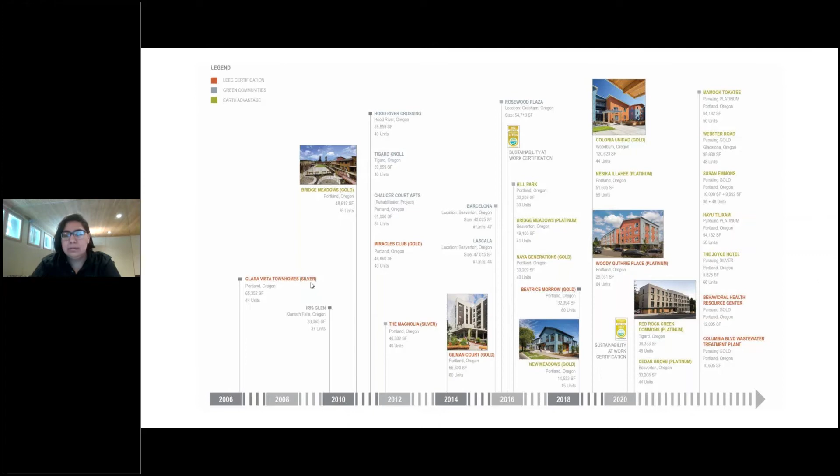but as I looked into these projects, I began to be more interested in affordable multifamily housing and seeing what helps make the most impact to the predicted EUI. But I will talk about that in the upcoming slides. And first, let's look into the overall data of the 3 years that reported to the DDx.

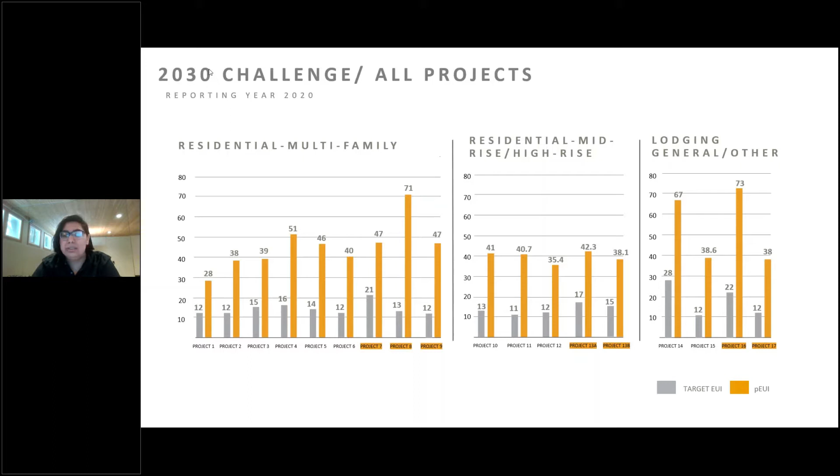One of the goals for CHA is to increase the number of projects that have 60% reduction. Since there have not been many of the projects with this amount of reduction, they are putting this into consideration for their future projects. So on the plus side, many of the projects are getting modeled and giving the firm better feedback for predicted EUIs, or energy use, and making it easier to see where they are standing in the overall average.

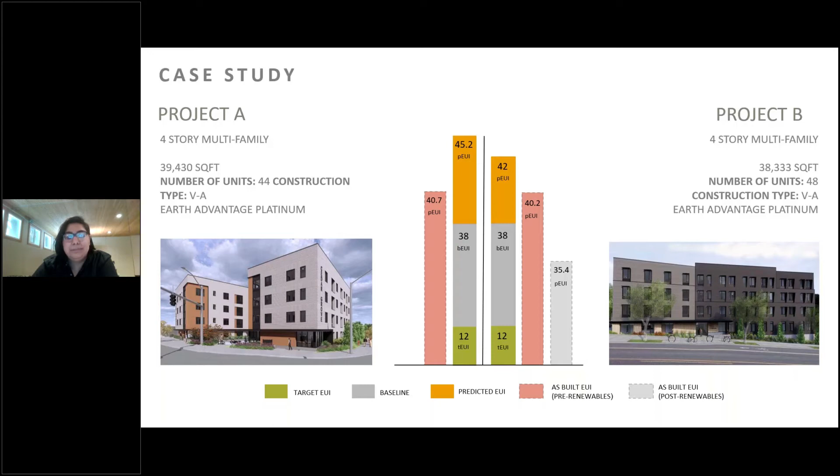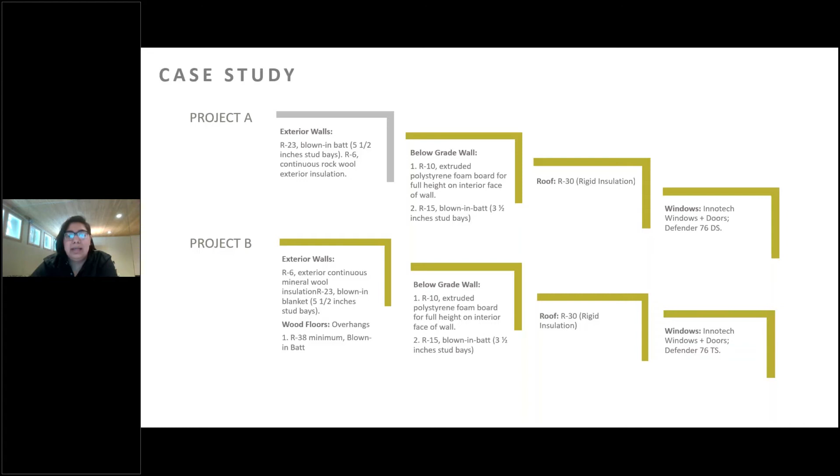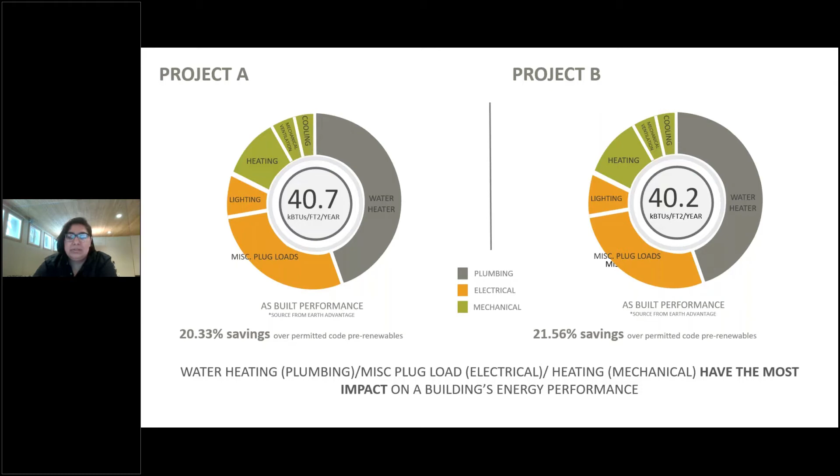And in my in-house presentation, we discussed the best way to improve our energy performance is by working with consultants and optimizing the performance of the projects early on to maximize our energy reduction, which in this case are tackling plumbing, electrical, and mechanical.

So now, besides my DDX reporting, I also wanted to learn more about building materials and how they impact human health. And me personally, I really wanted to dive into vinyl windows because it gave me a drive to find a different alternative, since I personally have been affected by the process in which many PVC materials are being made.

And I also did realize that many of the CHA projects use vinyl windows, and I wanted to see if there was an alternative way to be able to move away from that and be able to see the benefits of choosing an alternative.

So first, I really want to dive into how PVC is made and why is it important for regular people and architects to care about what harm can come out of creating a vinyl window. So one of the things that came to mind is the beginning process of vinyl windows, and that starts with where it's being made in the chemical plants, starting with oil.

And me living in an area like Pasadena, Texas, gave me a different perspective on how much harm can come out of materials like PVC, and it led me into a realization that it leads to many health problems with me, myself, my family, and my friends. And so with that, I believe that it's very important to know the life cycle of the materials that we are using.

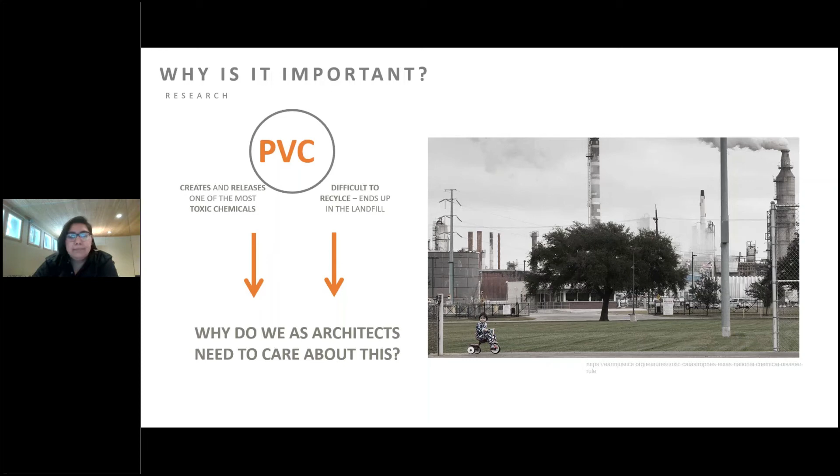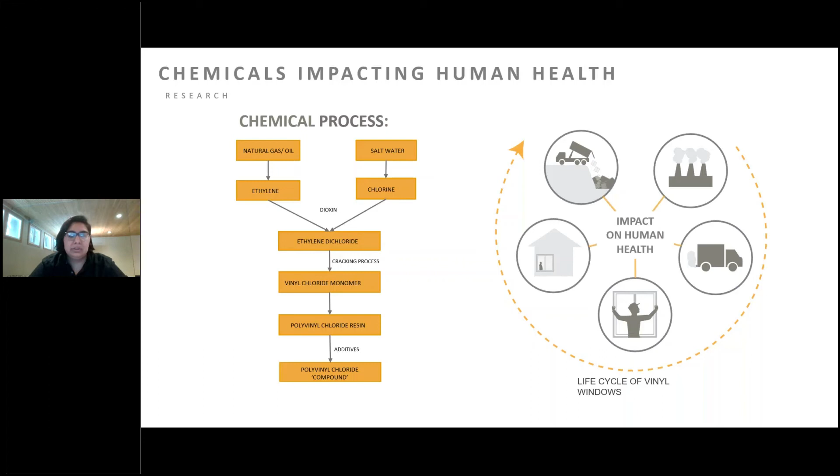But the 2 major parts are how the vinyl is going into the landfill and how it's being produced in the beginning.

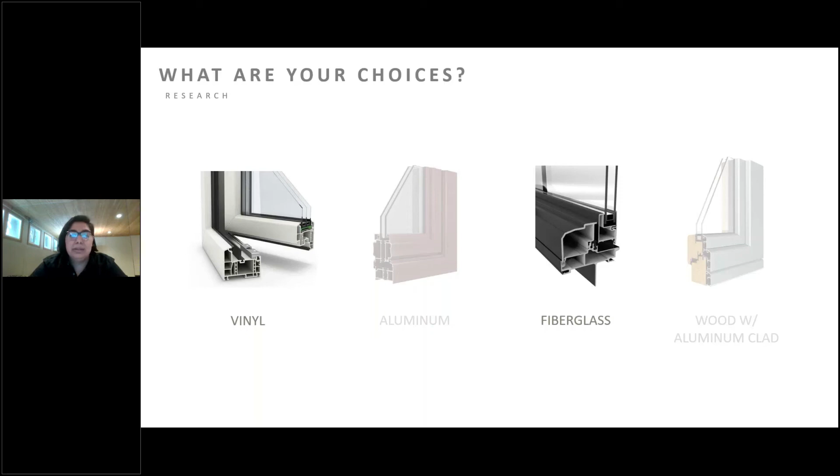Since CHA is doing more affordable housing, vinyl windows have been the best choice since they are really low in cost. But looking into other alternatives, I felt like fiberglass would have been a better alternative rather than vinyl. But we'll see in the next slide how exactly that would be.

So to draw a better conclusion, I ended up looking at one of the affordable housing projects at CHA to see approximately how many windows are being used in a project. And the total windows was 167 with the estimated cost of $91,850. And by choosing an alternative of fiberglass, there was approximately a 40% price increase.

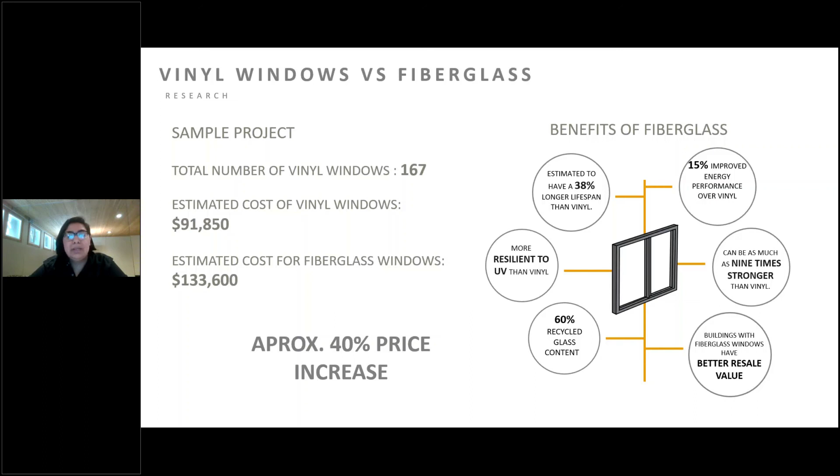And that's a really high price to put into an affordable housing unit, but seeing the benefits of fiberglass can counteract that and maybe lead to choosing that instead of vinyl because of the 38% longer lifespan, the resilience to UV, its recycled glass content, and it being 9 times stronger and having better energy performance than vinyl.

So overall, I went into all 4 of them and was able to create this chart specifically for CHA as a guideline to make an optimal choice when talking to a client. I was able to collect all the data I researched and create a simple to read visual chart and hope that they will be using it during the design phase to help make better choices.